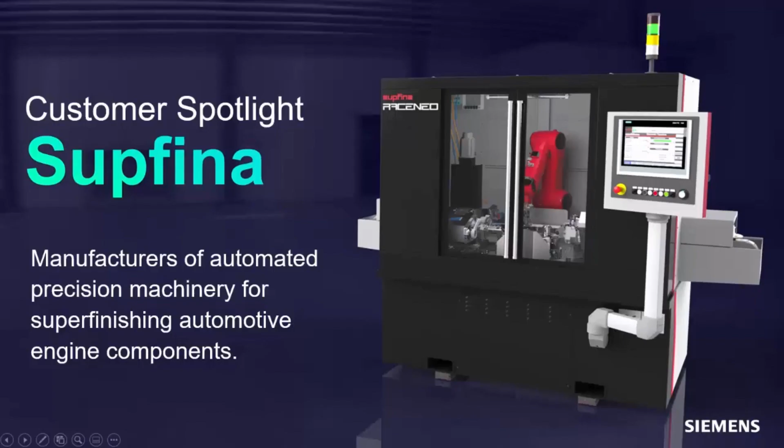Thank you, Michael. Welcome to this webinar on Solid Edge 2024. We're going to share with you today some of the great new functionality that's in Solid Edge 2024, allowing you to unleash the power of intelligent product design. Our featured customer in this year's release is Supfina from Germany. Supfina produces high precision, fully automated grinding and honing machinery designed for super finishing automotive engine components such as crankshafts and camshafts.

With this year's release of Solid Edge 2024, we continue to push the boundaries of product development. Solid Edge 2024 empowers users to design more intelligently across every aspect of product development, with a continued focus on the user experience and large assembly performance. Solid Edge 2024 introduces functionalities and enhancements to automate and speed design, as well as collaboration. Here are just a few examples: 9 times faster graphical performance, AI assembly relationships, great advancements in intelligent dimensioning, intelligent dimension checker, and so much more. We believe Solid Edge 2024 is up there with the best releases ever, but that's up to you to decide.

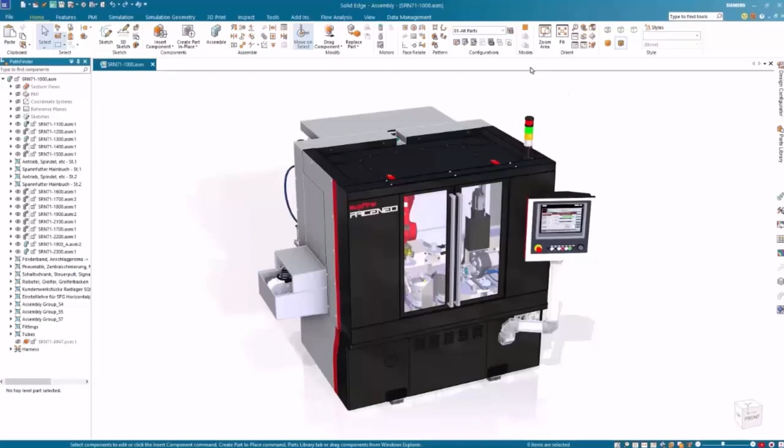Let's start with a look at some of the overall productivity enhancements. These are the things that will definitely make your daily life easier, and we are leveraging AI technologies in the design process to push that even further. Let's take a look. Let's focus on the polishing tool and fixture for these high performance motorsport roller bearings from this Supfina dataset.

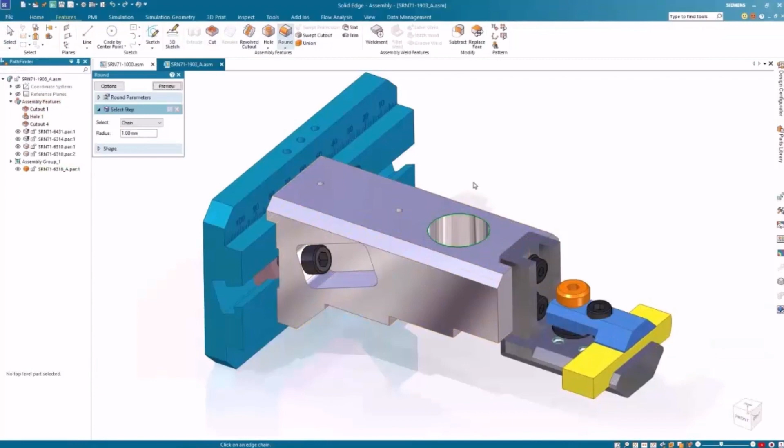By expanding the assembly features in Pathfinder, we notice a hole and cutouts are added at the assembly level and need to be completed with a round and chamfer. This can be solved by reordering the assembly features with the new simple drag and drop process that resembles reordering part features. This allows you to move parent and child features together, keeping your model organised.

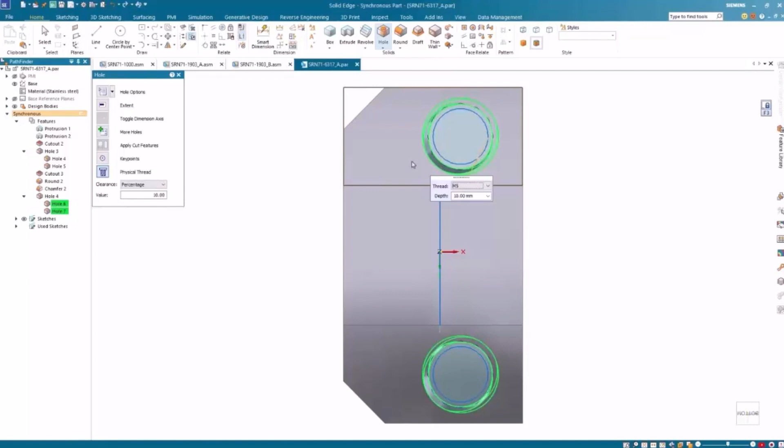The polishing tool has a 3D printed component that requires 2 holes to be added. To ensure appropriate fit and assembly for the 3D printed threads, we can define additional clearance values using the hole command. The values can be input as either a percentage or an absolute value. By selecting percentage, the internal diameter will increase by a percentage of the nominal diameter, which is seen in relation to the sketch. We can also switch the option to absolute to enter a specific measurement.

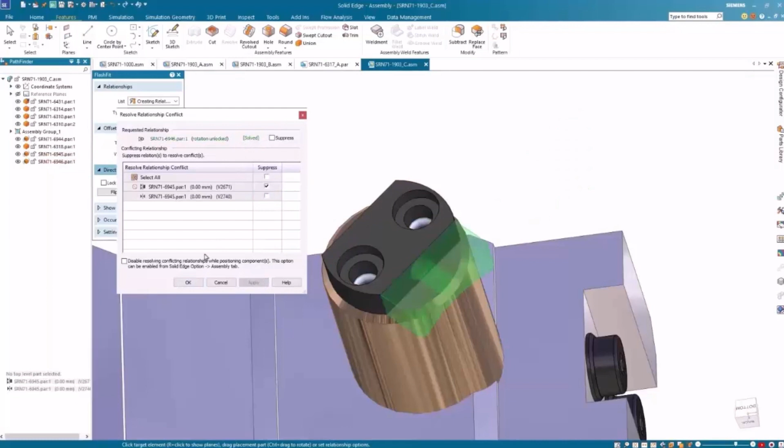To finish off the assembly, a polishing tool can be added to the bottom of the cylinder by adding a mate, planar align, axial align with the hole that connects the main assembly. Using the Resolve Relationship Conflict dialog box, we can easily identify and suppress conflicting relations to resolve them swiftly. This new tool helps streamline part placement and assembly relationships. Hovering over listed conflicting relationships in the dialog highlights them graphically. One or more relationships can be suppressed at a time until the requested relationship turns green.

The improved Replace Part command leverages artificial intelligence to predict solutions for replacing a single component occurrence constrained to a neighbouring component within an assembly. The AI predictions support planar and axial align relationships and present the solution in a secondary dialog, allowing us to preview and select the most suitable option before executing the replacement.

Enhancements to the variable table filters provide easy and quick access to filter options, resulting in an efficient experience that reduces both time and mouse clicks.

The variable table can be used to reposition the polishing tools and ensure they will contact the bearing in the correct locations. With numerous variables in the assembly, the results can be filtered by user created, system created, or both. Another great option for filtering is to only view variables relative to components that you select.

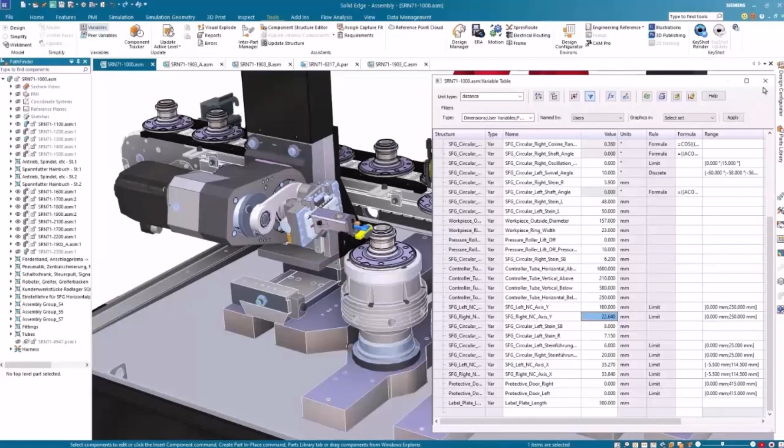This makes it easy to find the swivel angle variable and make a change. The vertical height of the polishing tool can also be changed by updating the NC axis variable.

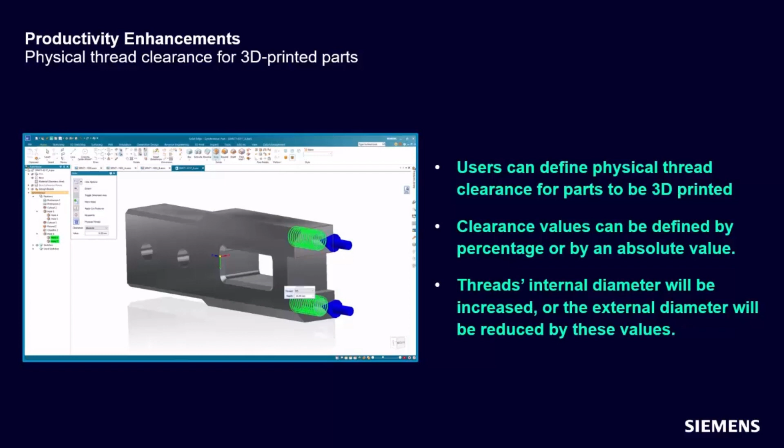One of the things that you saw was physical thread clearance on 3D printed parts. Turns out this is really important because unlike manufactured parts, where the standards define the clearance and high tolerances keep things working smoothly, in 3D printed parts you can get clashes that prevent smooth operation. Solid Edge automatically eliminates these, ensuring your printed parts work effectively and as designed.

You also saw the power of AI in action. With the improved Replace Part command, Solid Edge can now intelligently suggest assembly relationships and predict valid alternative solutions. The predicted solutions are graphically previewed in the design environment and can be easily selected in a pop-up dialog.

And in addition to working with your custom part designs, the AI-enhanced Replace Part functionality also works with parts from standard parts and 3D Find It part libraries. Really powerful stuff, and this is going to save you loads of time. And it doesn't stop there. Let's take a look at some more productivity enhancements.

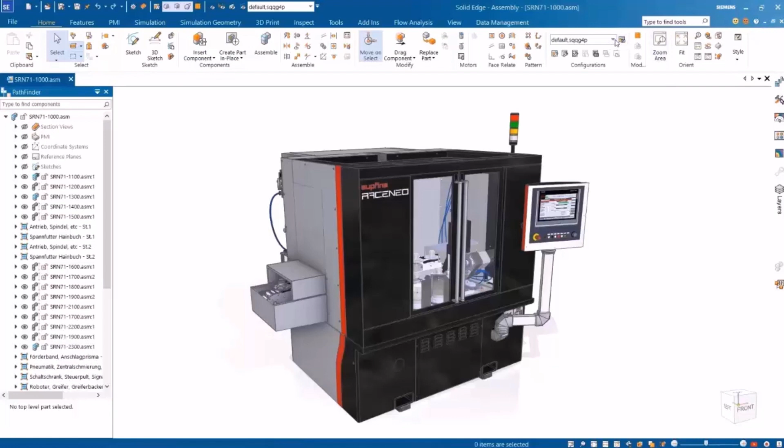Locating just the right part has never been easier. Search wildcards are supported in parts libraries, model view palettes, and the assembly PathFinder. These wildcards provide flexibility when searching, allowing you to match and retrieve parts based on partial or uncertain terms or variations in spelling in your query. Search results display subassemblies and parts in various shades of green for easy identification.

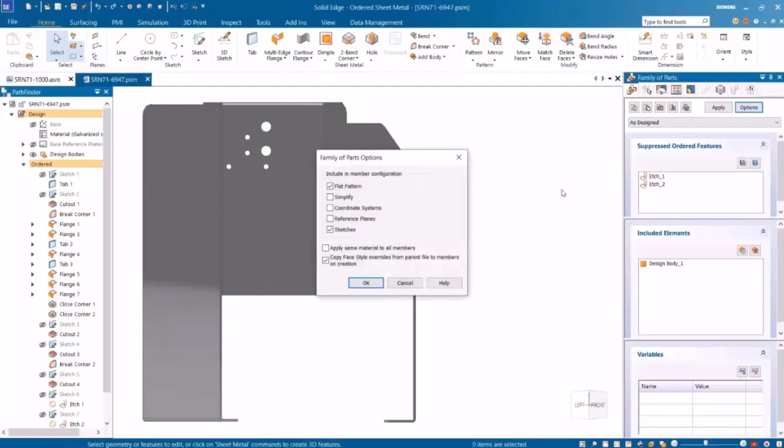With expanded family of parts options, flat patterns can now be included while working on sheet metal parts, containing all the information you need to create drawings and annotations. Once we define the new members, we can see options to capture sketches, file properties and variables.

Further enhancements to family of parts include the ability to set individual material properties per member, as well as control over the suppression state of sketches and etches. Selecting a specific member shows the material change alongside the different etches specific to each member.

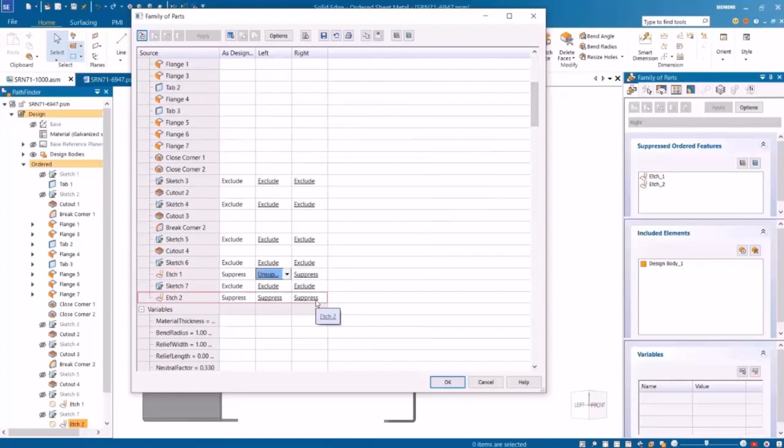Greater control of selecting objects has been added with the polygon and lasso selection fence options. This makes many common workflows much easier, like resizing holes. Using the lasso selection option, we'll select the desired holes and change the size with ease. Polygon and lasso selections are available in the part, assembly, draft and subdivision modelling environments.

Many designs require handed parts. These symmetrically opposite parts are identical, mirrored copies of one another. A new streamlined workflow makes it easier and faster to create these left- and right-handed parts that can remain associative to the original part if needed. With the selection of the face, mirror and a quick save, our new handed part is immediately available for use.

And the best part of using the Save as Mirrored command: all the features used for creating this sheet metal part are carried over, minimising errors when making downstream design changes.

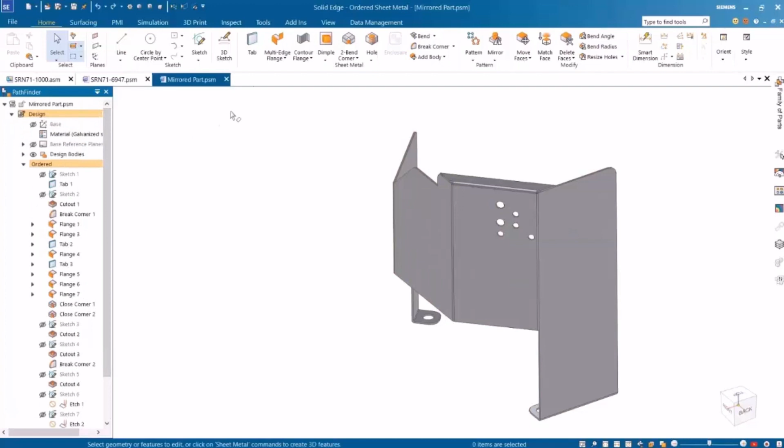The display of bend centre lines in the flat pattern environment is now supported within the sheet metal environment. Colour coding defines the bend direction: up bends are displayed in blue, down bends in green. The colour and style of centre lines can be easily modified to suit your company standards.

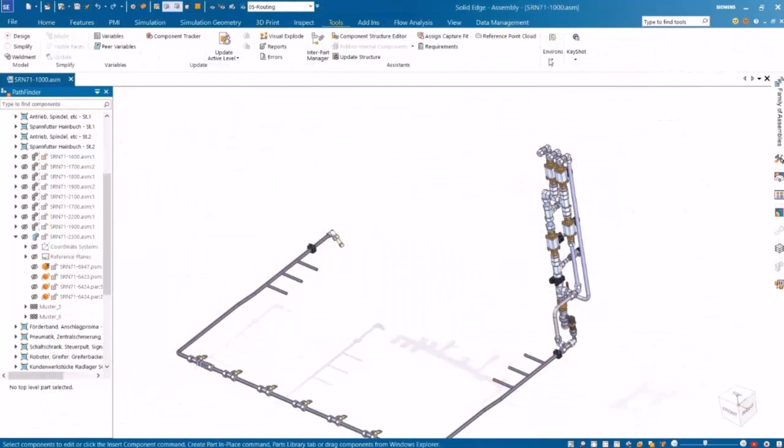In Solid Edge XpresRoute, multiple pipes and tubes can now be automatically trimmed with the help of the trim command. In this example, after turning on the clipping planes, we can see that there is overlap between the main tube and the 3 cleaning tubes.

We can trim these tubes so they join together seamlessly with just a few simple clicks. By selecting the primary and secondary tubes, the trim tubes command intelligently cuts holes in the main tube to the outside diameter of the secondary tube and trims the 3 cleaning tubes to fit, as we see here.

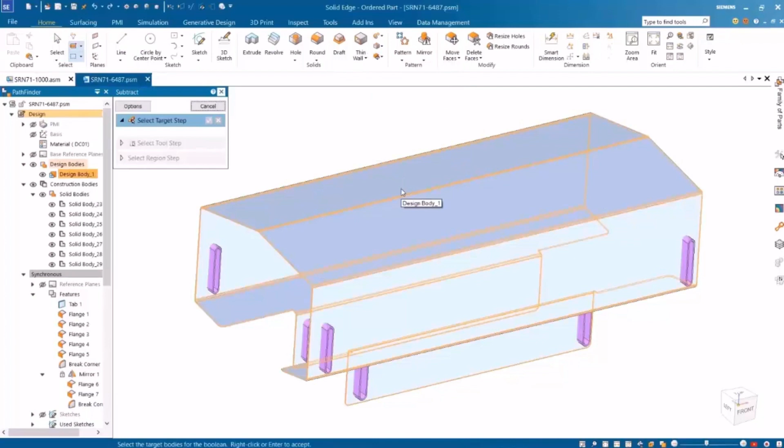Another new capability in Solid Edge is the recent documents preview, where we can easily select the part we'd like to work on without exiting the environment, saving time and energy. This sheet metal cover requires some modification, the addition of several punch slots. 7 construction bodies have been placed in the sheet metal part to represent the punches used to remove the material.

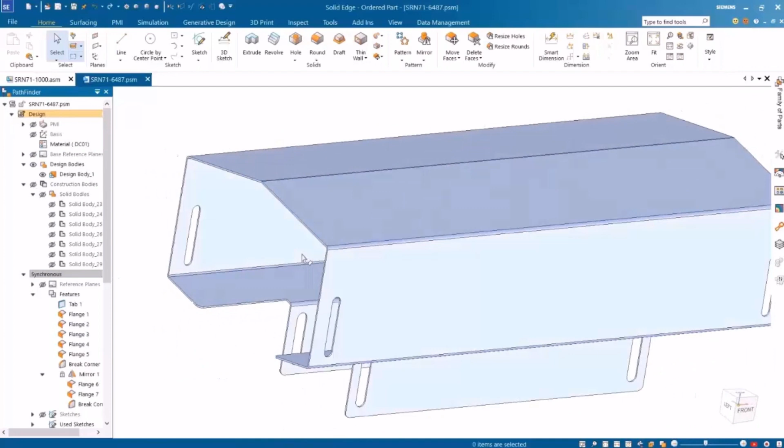Using the subtract command, we can select the main target body and then quickly and easily choose the solid bodies as a tool step, all within the same window. Unwanted regions left behind as a result of this subtract operation, or disjoint regions, can be intelligently identified and automatically removed. Hiding the construction bodies, we can see all the internal disjoint regions within the sheet metal part have been removed.

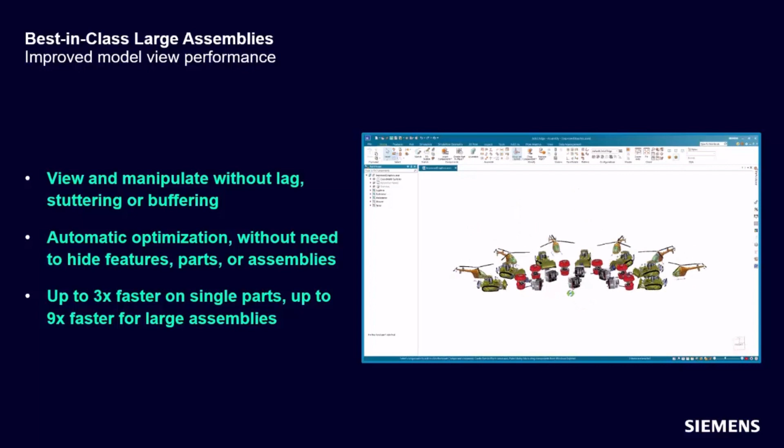Next up is large assembly performance. Solid Edge truly has best-in-class large assemblies, and now it's even better. Better model view performance allows you to view and manipulate even the largest assemblies without lags, stutters or buffering. As you can see, view manipulation is automatically optimized, allowing users to run the most demanding assemblies at lightning speeds without loss of detail or the need to adjust settings to hide features, parts or assemblies.

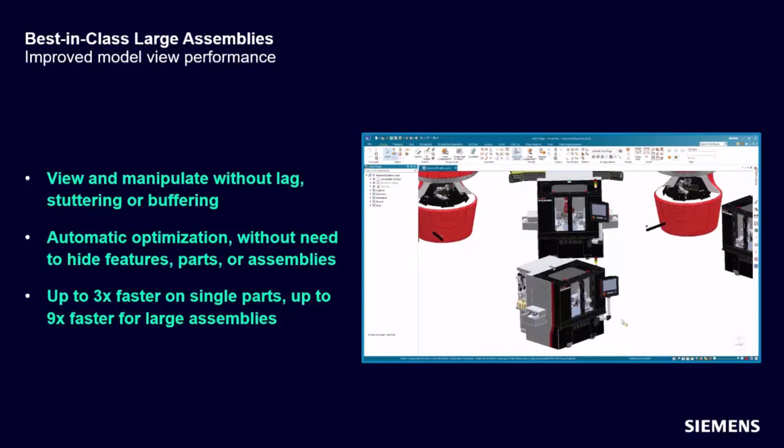Dynamic viewing is up to 3 times faster on single parts, up to 9 times faster for very, very large assemblies. Don't take our word for it. Try it yourself on your assemblies.

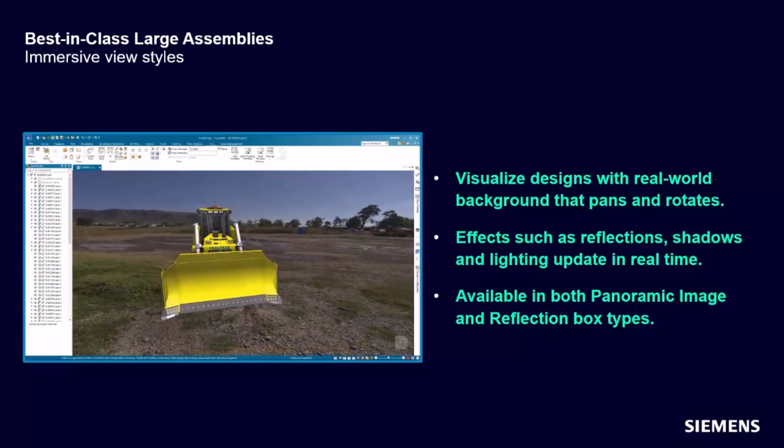The new immersive view styles puts your models in a real-world environment that automatically updates with model movement for more realism. In addition to the amazing speed improvements, you can also now visualize designs with a real-world background that pans and rotates with your model to create a more immersive user experience. As the design is manipulated, graphic effects like reflections, shadows and lighting are also updated. This creates a more realistic, lifelike representation of the model's environment, just like you're walking around the model in the real world.

Next up is Design Configurator, and I want you to pay special attention here because we know so many companies can benefit from this technology. Not only can you configure your own designs instantly, but now we're also delivering pre-configured conveyors and ladders and other equipment that is commonly used in large machines and plants. What a time saver. Let's take a look.

Manufacturers are facing increasing pressure by their customers to offer greater choice and variety in their products. This can lead to an increase in the number of product variants organisations need to define, author and manage. New pre-configured models in Solid Edge Design Configurator allow you to quickly and easily place intelligent datasets for ladders, conveyors and enclosures directly into your design.

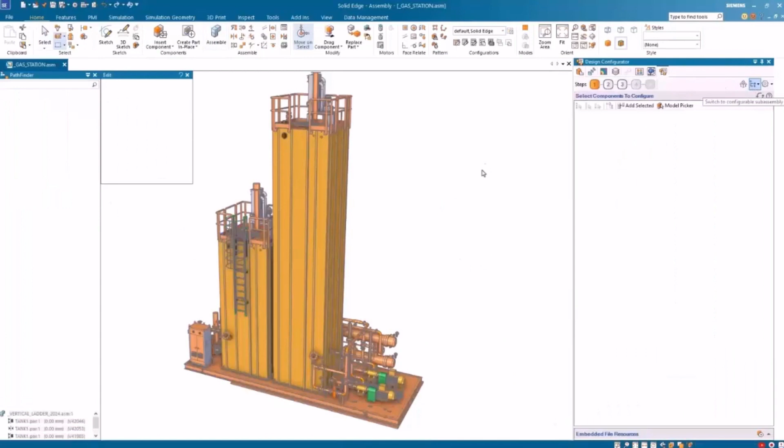The ability to customize fully configured sub-assemblies inside the main assembly helps simplify workflows and improve productivity. In this example, a fully configured ladder assembly is being modified directly within the main assembly environment. There's no need to go back to the sub-assemblies and configure them individually, saving you time and energy. A secondary ladder is needed to complete our design. After placing the ladder, we can customize the length due to the intelligent model's rules. A second section and hoop in the middle are also added.

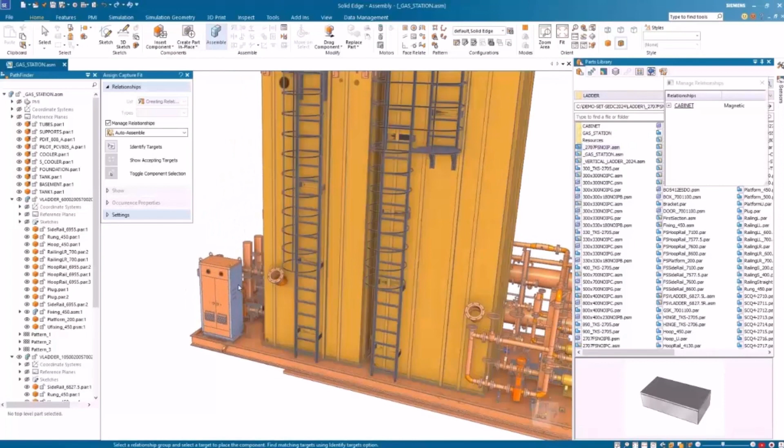To finish up the assembly, we need to add a final cabinet. The cabinet can quickly be customised inside the main assembly with the necessary dimensions and colours to fit our needs. With access to fully configured datasets such as ladders and cabinets, it's never been easier for customers to get started quickly with Solid Edge Design Configurator.

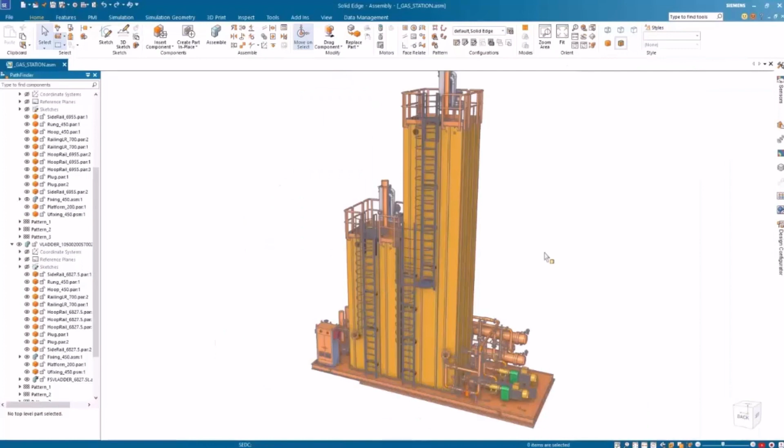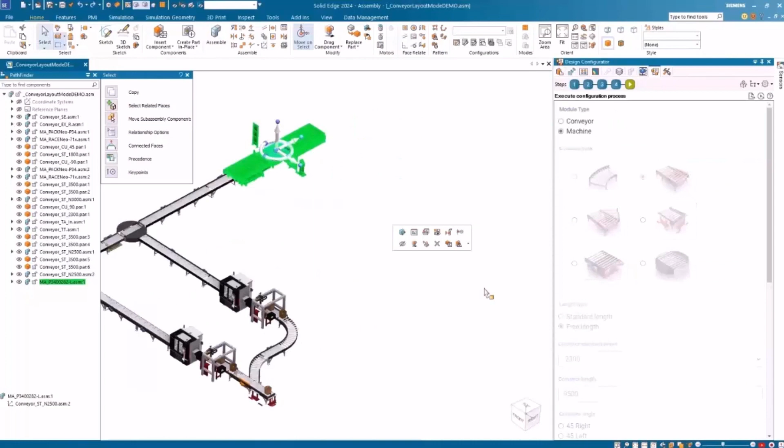Solid Edge Design Configurator can automatically calculate the number of conveyors and other components needed to match the user's specifications. By inputting 10 meters, the software automatically determines the number of conveyors needed within the specified distance to complete the line. With the last machine added, the new assembly line is finalised and ready to be used.

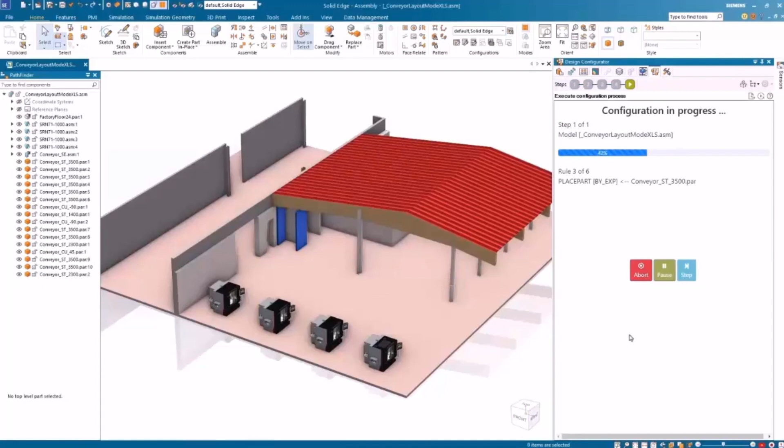The new ability to read from Excel files and external databases for input data and model actions allows you to automatically complete assembly lines at a fraction of the time. By reading the necessary conveyor placement data from an Excel file, the software instantly configures and completes the assembly line with just one click, like we saw there.

Could you use something like that in your business? Isn't it amazing how quickly those conveyors went into place and were fully configured in seconds? You can really boost design speed using pre-configured models of ladders, conveyors and enclosures. One of the most requested customer features, pre-configured models downloaded from the Siemens Support Center, can now be directly used in the assembly at no cost to the Solid Edge Design Configurator user.

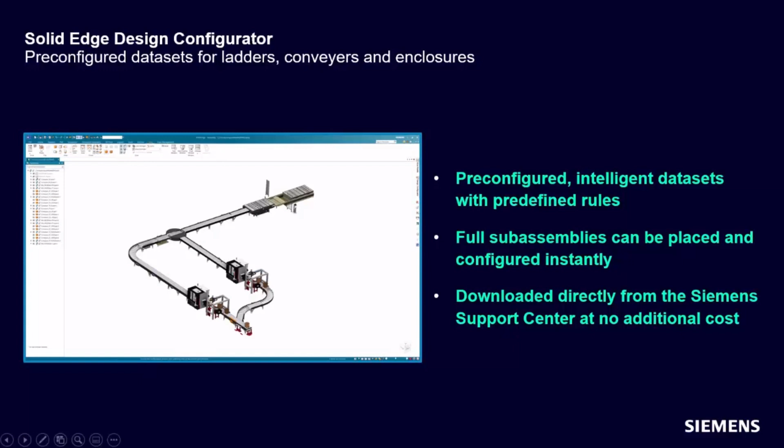In addition to all the great Solid Edge functionality you saw for configuring designs, you can also take advantage of Solid Edge Design Configurator Connect. This is a user-friendly, web-based configurator that manages the most complex pricing and product configuration, allowing users to configure online in any browser simply and easily, and automatically generate sales documentation, including 3D models. Connect your engineering processes with sales and marketing, streamlining design workflows with the new Solid Edge Design Configurator Connect.

Moving on, let's take a look at model-based definition, often just called MBD. This is all about moving the intelligence of the drawing upstream into the model. Why should the geometry be in the model, but critical information like tolerances be in the drawing? When we move all the intelligence into the model, we lower the 3D communication barrier and better convey design intent for downstream manufacturing processes. Here's how it works.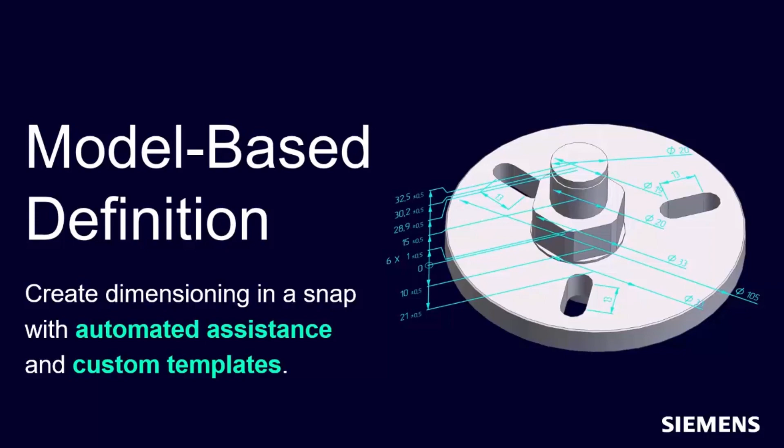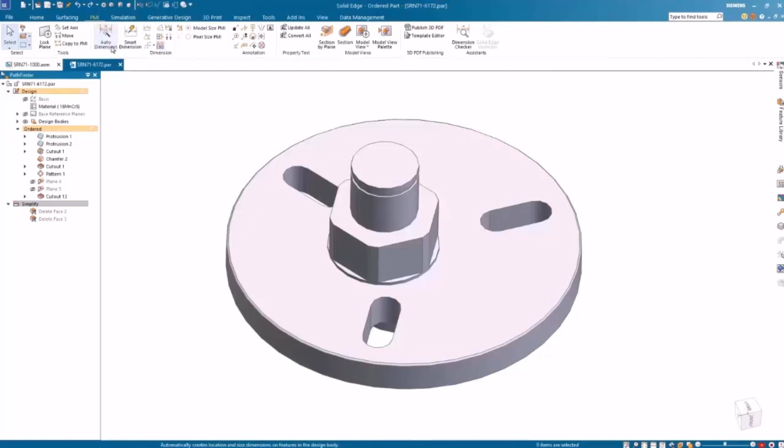Intelligently define and annotate 3D models while better conveying design intent for downstream manufacturing processes with Solid Edge Advanced PMI and model-based definition. The improved auto dimension tool in Solid Edge Advanced PMI can be used with one or two datums for more freedom when automatically dimensioning turn parts. Using the new recent documents preview, we'll open another bracket that's been partially dimensioned.

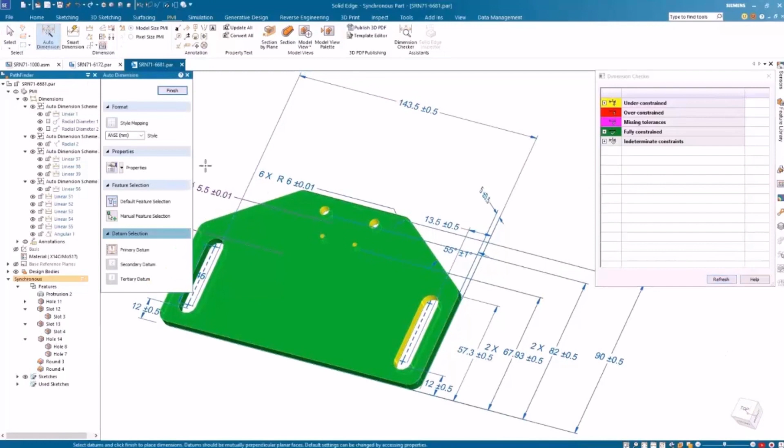With the dimension checker command, quickly and easily identify the constraint status of features and parts. The model is automatically color-coded with feature IDs, informing you of the constraint status of features and if they lack tolerance information. In this example, the slot and holes are under constrained, and the dimension is missing a tolerance value. By adding the necessary tolerance, Dimension Checker will instantly update with the new status, and the Auto Dimension tool will automatically add the missing location dimensions for the holes, improving the creation speed.

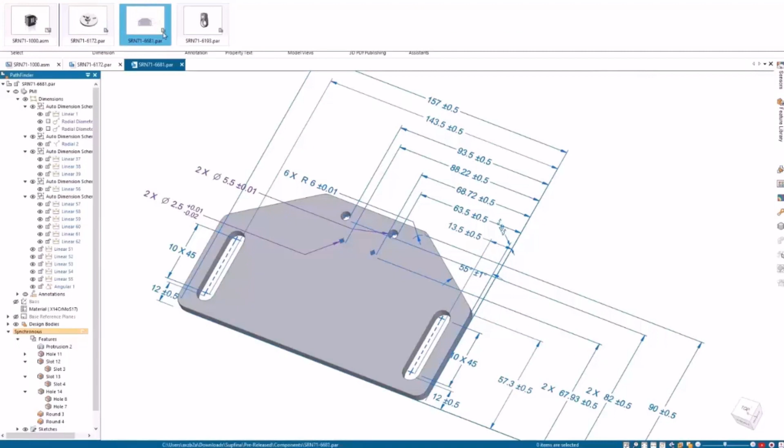The improved Auto Dimension tool also includes stack dimensions and callouts for slot and oval cutouts. Features chosen in the selected primary, secondary and tertiary planes can be auto-dimensioned instantly. The Common Model Views command allows users to create common model views automatically with existing PMI with the required views selected. Solid Edge automates the view creation.

Applying section views to a model view is easy with the enhanced vertical command bar that can be launched from the model view palette. These easy-to-use command bars make editing model views simple, like adjusting the render mode as we see here. To clean up the PMI dimensions, we'll run the Enhanced Arrange Dimension command, which provides the ability to arrange coordinate dimensions alongside linear dimensions.

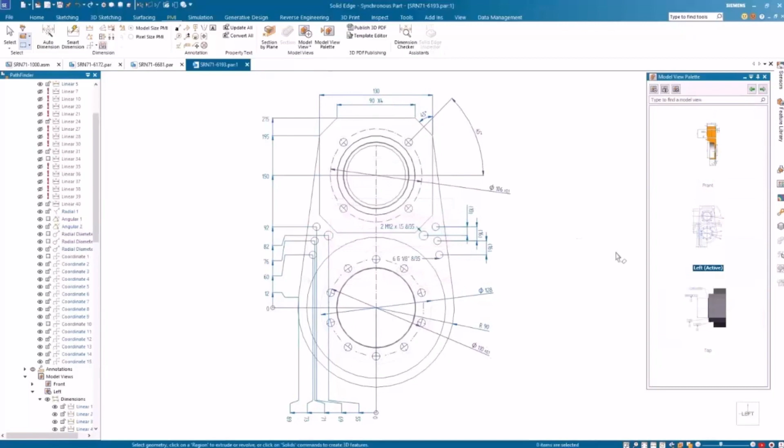The Update Model Views automatically updates all model views when the model changes or a PMI is added or removed. Auxiliary plane indicators can be added, giving us more freedom to annotate the models based on an ISO or DIN standard, as we see here. Convey design intent for downstream manufacturing process with 3D PDFs that can be published using templates. You can export PMI views with selected section views and render styles to the 3D PDF, including those created with single planes to streamline the delivery of relevant design information.

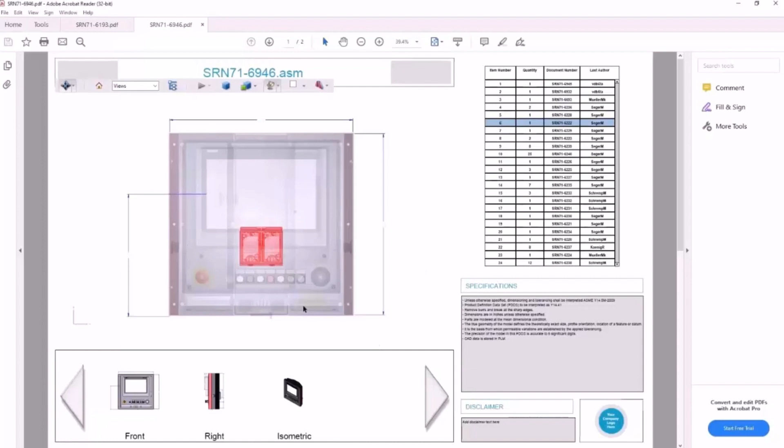With new PMI face association, parent faces and section views are automatically highlighted when they are selected in the 3D PDF. For assemblies, 3D PDFs can contain an interactive parts list. On selection, parts are highlighted in the list and graphics window. Associated properties such as author can also be included. Interoperability enhancements allow your Solid Edge files to look the same when opened across the Siemens Accelerator portfolio, including NX. The improved PMI association and support for various PMI data provides increased connectivity for downstream applications.

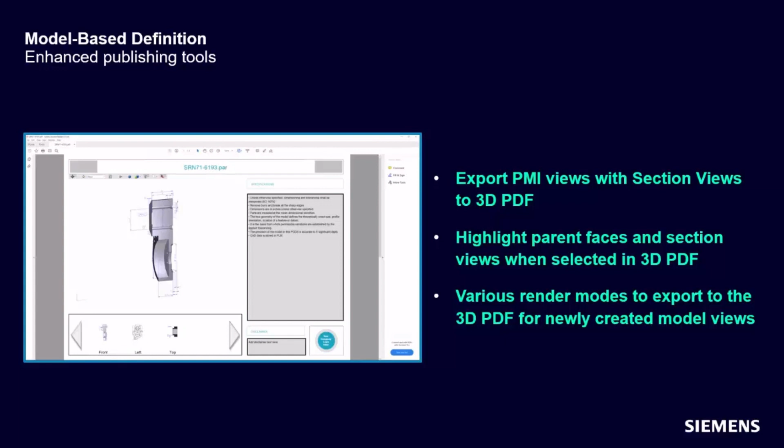Now, I've been talking a lot about core CAD functionality, and that truly is important, but more than ever, collaboration is key to improving engineering productivity. No one could have imagined over recent years how distributed our teams would become, but we definitely have some amazing tools to support this, and this comes in the form of Solid Edge SaaS, where collaboration is built right into your daily work. Let's take a look.

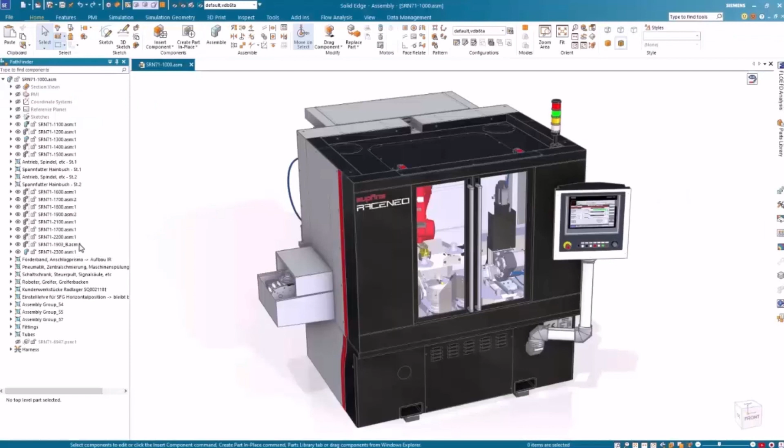Fully embedded in Solid Edge 2024, Teamcenter Share streamlines collaboration with your team, partners and customers. Users can now access Share's comprehensive suite of collaboration capabilities completely within the Solid Edge environment. Open our Supfina superfinishing machine from Teamcenter Share in Solid Edge. We can get to work quickly as we look to add threaded holes to this part we plan to 3D print. Here you'll notice the option to add additional clearance to the threads that we discussed in an earlier demo.

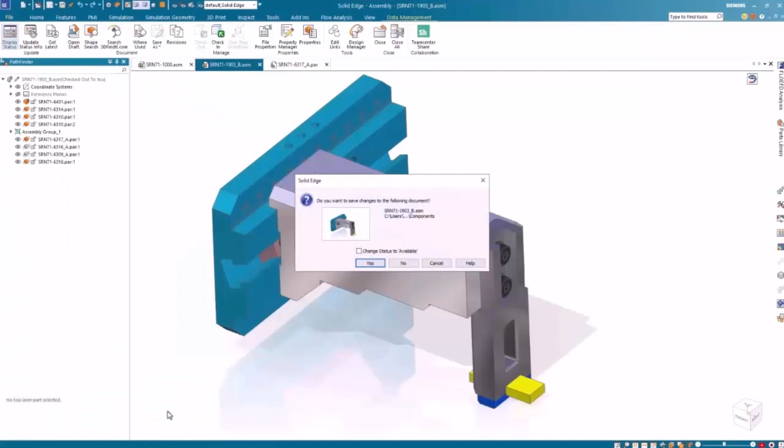Using the built-in data management capabilities, we can check in files to allow other users to make modifications or check out an assembly to ensure exclusive access while we make changes. Again, with Teamcenter Share fully embedded in Solid Edge, we never have to leave the design environment as we create a project with just a few clicks. With Pack and Go and the Siemens Connector, we can share the subassembly directly to Teamcenter Share.

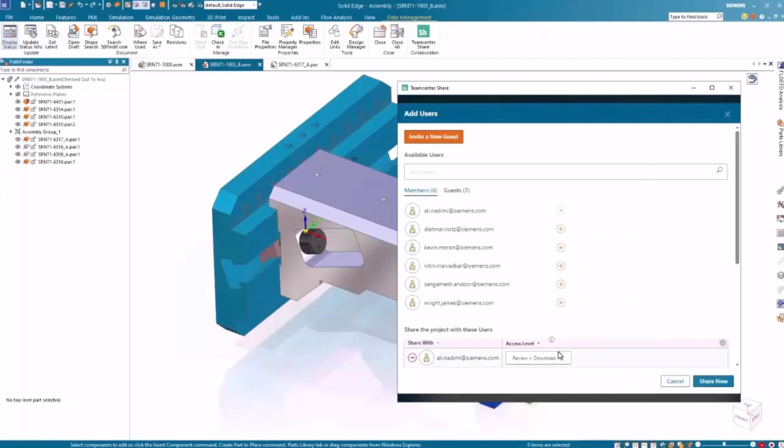Back in Teamcenter Share, within Solid Edge, we can open the project and add users to share it. Users can be granted various access levels depending on the type of collaboration needed. We'll grant this user owner rights, giving them complete access to review, edit, delete, or reassign the project. Other access levels include review plus download, and full access. Opening the viewer markup gives us the ability to inspect the data quickly and collaborate with our team members.

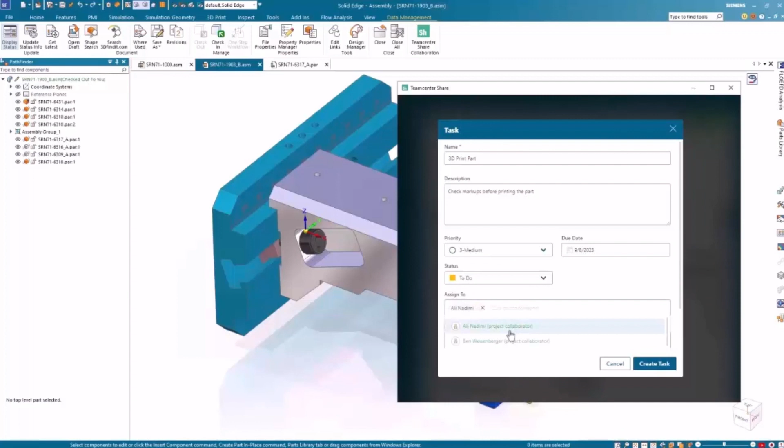With the addition of threads, we want to make sure the spacing is still correct. A quick comment starts the conversation, and saving the markup makes it instantly available to our team. Creating tasks has never been easier in Solid Edge thanks to Teamcenter Share. After naming the task, users have full control to add descriptions, set priority levels, due dates and statuses, and can assign the task to team members. Tasks can be viewed in a variety of ways, including on your Teamcenter Share dashboard, or as we see it here, in a Kanban board. Working together to help you work better together, Solid Edge and Teamcenter Share continues to boost collaboration and productivity.

So you saw how you can access Teamcenter Share's comprehensive suite of collaboration capabilities fully in the Solid Edge environment. The complete Share web user interface is embedded entirely within Solid Edge 2024, allowing for more streamlined collaboration workflows right at your fingertips. The same browser-based experience of Teamcenter Share is still available anytime, any place and on any device as before. But now Share is also available without leaving Solid Edge. This saves users time by eliminating the need to switch between different application windows. Plus, you can synchronize your Solid Edge design data on your desktop and in the cloud. Automatically installed with Solid Edge, Siemens Connector offers enhanced integration between Solid Edge and Teamcenter Share, enabling you to work seamlessly with your cloud and desktop data alike.

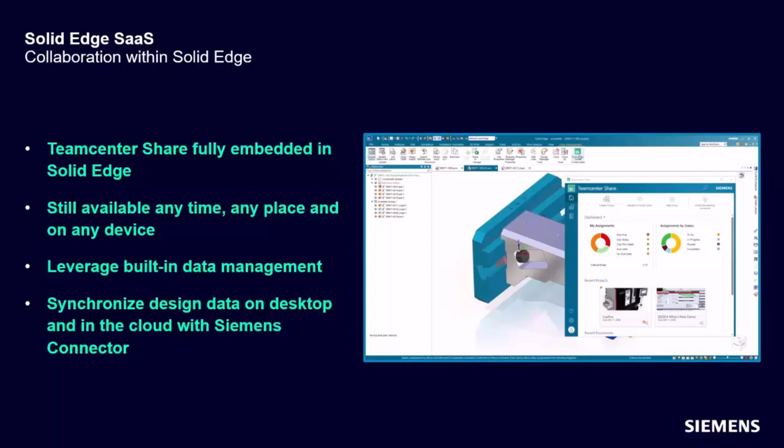In addition to the great enhancement of having Teamcenter Share embedded in the Solid Edge environment, we continue to improve Teamcenter Share as it supports products across the Siemens Accelerator portfolio. You can now onboard multiple users faster and easier, or share projects, assign tasks and send messages to users not currently associated with the project, attach notes to projects, files and tasks, and send messages instantly. To support ever-growing file sizes, especially those for simulation files and results, users can now upload files of up to 500 gigabytes each. Additional cloud storage packages up to 100 terabytes are now available.

Okay, so changing tack a little bit, Solid Edge CAM Pro has also received a great update. Get faster and more accurate programming with Solid Edge CAM Pro. Let's take a look. Solid Edge CAM Pro continues to improve productivity by leveraging artificial intelligence to suggest the most frequently used machining options in a new prediction tab. No more hunting for options. The prediction tab is customized for each user.

New for Solid Edge CAM Pro is auto-generate for 2-axis and 2.5-axis operations. For simple turning operations or for certain 2.5-axis milling, we no longer must generate the operation. As soon as enough parameters are available to calculate a toolpath, Solid Edge CAM Pro takes care of it. This makes NC programming faster by allowing users to review results far quicker. Similarly, any changes that require recomputation are automatically performed. See the latest result as soon as the parameters are changed.

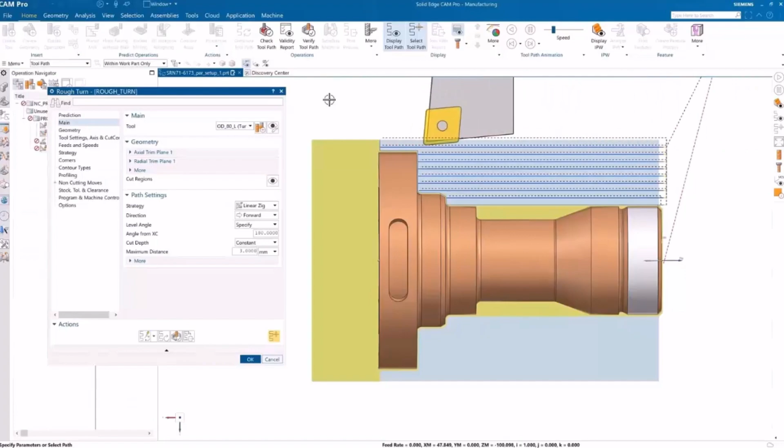New this year is support for prime turning. Using either Sandvik Prime Turn A or B turning tools, we can quickly, efficiently and safely remove the material from this undercut. Notice how smooth the entrance and exits are, which produces less stress during the cutting and helps the inserts last longer.

Solid Edge CAM Pro introduces 3D adaptive roughing, which provides the most efficient roughing machining possible. 3D adaptive roughing has reliable dynamic holder collision checking when the tool moves within a region or across multiple regions. Toolpath generation is faster and bottom-up cutting has been enhanced. We also added a new option to top off flat faces for faster throughput.

Moving forward, with our success with PostHub, we are now introducing the Cloud Connect tool library. As the name implies, cutting tools are now stored in a cloud database for easy access. Tools and holding devices can be easily searched, downloaded and modified. Additionally, immediate access for cutting tool vendors is available from the same location.

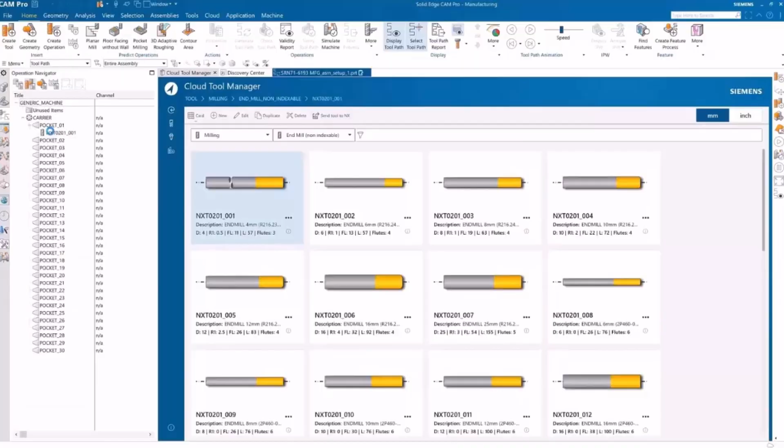Turn milling is a new operation subtype designed to easily machine concentric and eccentric cylindrical surfaces with a high surface quality, precision and high cutting volume. A new operation subtype in the rotary milling template, it is used to pre-cut cylindrical parts before machining segments with other rotary milling operation subtypes. Solid Edge CAM Pro provides cutting edge updates that accelerate machining while bringing the power of artificial intelligence and the cloud to your manufacturing process.

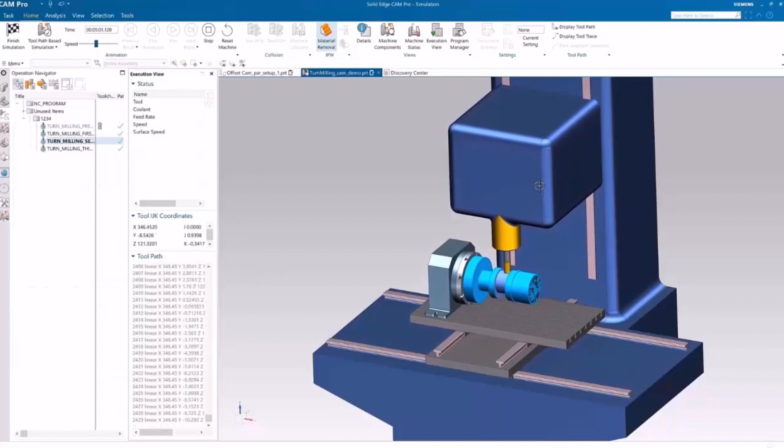If machining is your thing, you have noticed some real time savers in there. The 3D adaptive roughing means faster programming and more efficient machining, while the AI assisted operation editing predicts the most probable parameters, accelerating programming and processes and ensuring accurate repeatability. The new prediction mode will learn from the user's best programming practices to dynamically change and predict user behavior.

The Cloud Connect tool library is a new application that utilizes the cloud to provide a user-friendly, intuitive experience when previewing tools and dimensions. And prime turning is now supported. Prime turning is a new methodology which enables turning in all directions, resulting in a 50% productivity increase for turning operations.

Now moving on to simulation. Enhancements in Solid Edge Simulation and Simcenter Flow EFD for Solid Edge increase simulation performance and speed with improvements to meshing, structural analysis and interoperability. Let's go and take a look. New for Solid Edge 2024 is the ability to import solid temperature results from Simcenter Flow EFD for Solid Edge into a Solid Edge static simulation study.

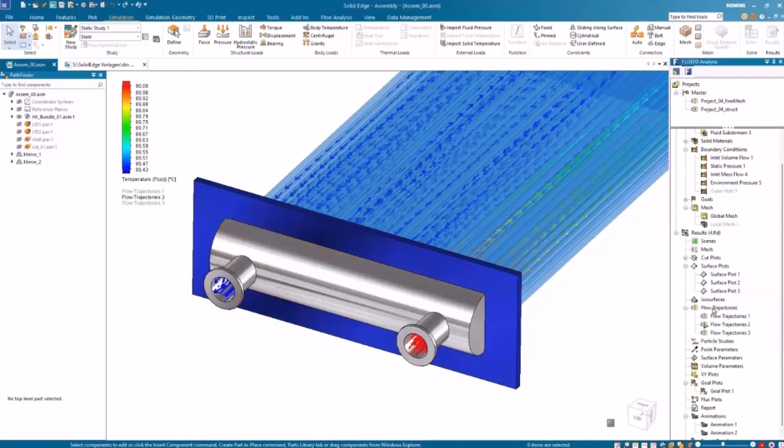Here we see the results of a Flow EFD simulation in a heat exchanger and the temperature distribution of the fluid flow on the parts. Changing to Solid Edge simulation, we already have a study created with all the constraints but without any loads. Using the new import solid temperature function, we can set the load for our simulation study and start the solve. The Solid Edge simulation study processes the results from Flow EFD and solves the calculation. Viewing the results, we can see there are high stresses in the parts implemented by the temperature loads.

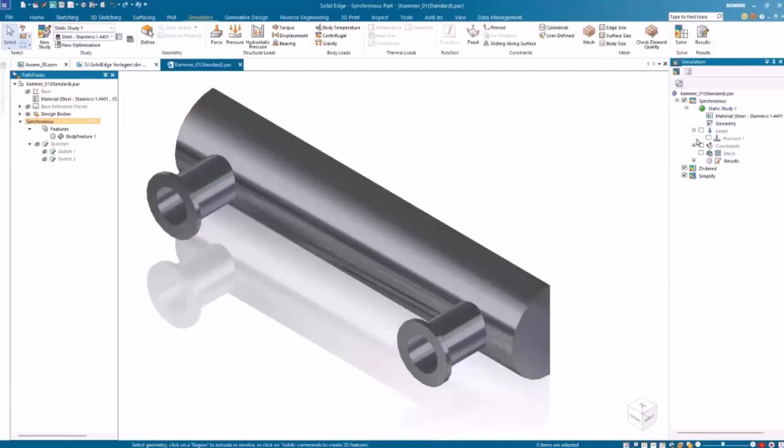The interoperability between Solid Edge simulation and Simcenter Flow EFD for Solid Edge is useful to find the thermal stresses and deformation in solids, helping understand part behaviour and avoid failures long before real products are manufactured. Solid Edge 2024 also introduces the ability to apply a force to any user-defined point, allowing for greater control of simulation studies. In this example, we have already created a study to show what happens when the component is put under internal pressure. With some further analysis, we can devise some additional loads.

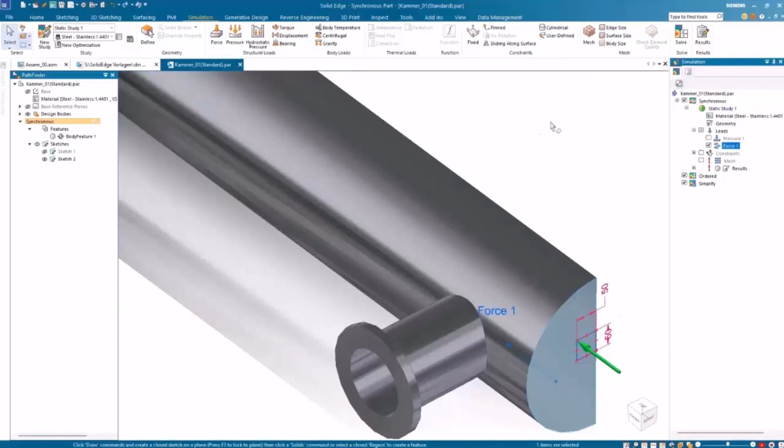An easy way to do this is simply to add a force to a point. We have already defined a sketch, but we'll add an additional sketch point that we wish to use in our study. New in Solid Edge Simulation 2024 is the ability to define a force by selecting a user-defined point. This provides greater control and flexibility.

We'll set the force direction, solve the study, and then review the results. This is another example of great productivity enhancement in Solid Edge Simulation 2024. Finally, we want to look to another function that is very useful for checking more complex models. A model already has a mesh generated.

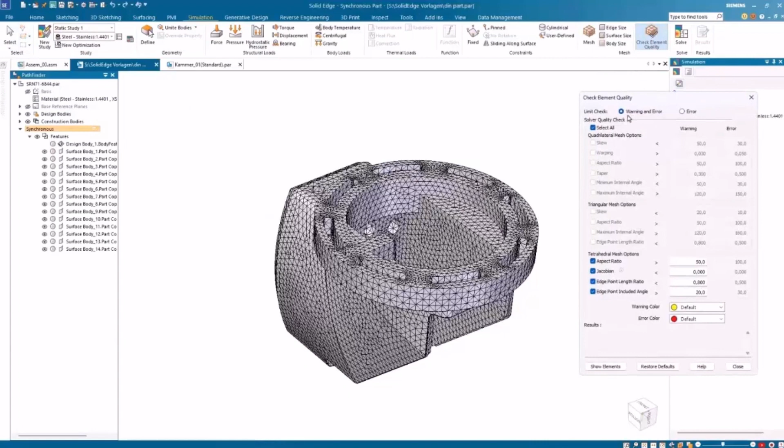We wish to analyse the quality in the part with the check element quality function. In previous versions, it wasn't always easy to identify the problematic areas within a part. Now the display of mesh quality checks has been improved to make it easier to identify poor quality areas. Users can now immediately identify the areas of poor quality and take the necessary actions to address them.

We've just seen how Solid Edge Simulation users can now import solid temperature results from Simcenter FloEFD into a Solid Edge study. The new option to apply force to any user-defined point rather than just a mesh vertex allows for greater control of simulation studies. And the display of mesh quality checks has been improved to make it easier to identify poor quality areas.

Finally, the insulated gate bipolar transistor or IGBT compact model is now composed of an electrical element and two resistor component compact models, providing a very efficient representation of the IGBT element.

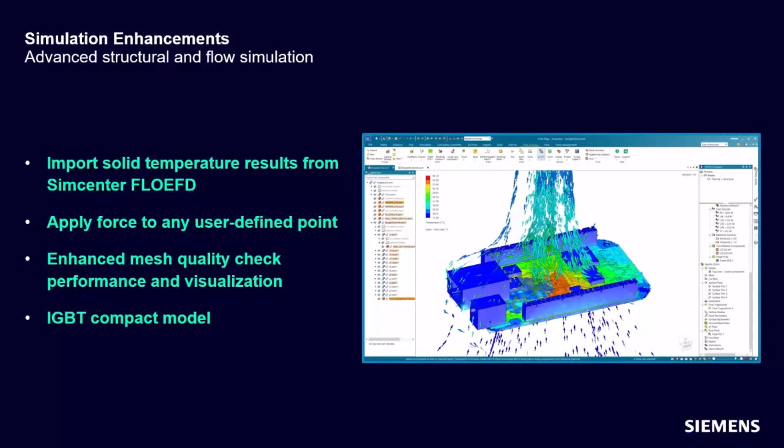Next, let's talk about value-based licensing, which is a truly important innovation, allowing you to explore and use a wide variety of Solid Edge portfolio products at a very low cost. Rather than traditional purchasing of individual products, value-based licensing provides cost-effective bundles of license tokens that can be used to access Solid Edge add-on products on demand.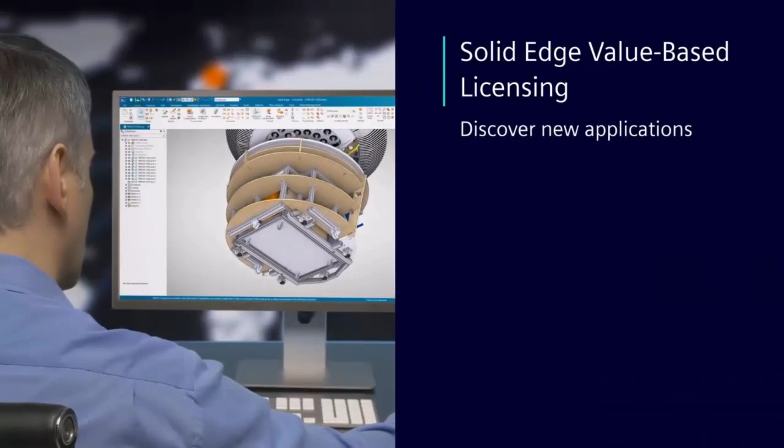You get instant access to advanced functionality that can be shared across your product development teams on an as-needed basis and at a much lower cost than buying individual products. Let's take a look at how this works. New for Solid Edge, value-based licensing. A flexible licensing option to help you with the challenges of a rapidly changing development environment. This approach allows you to discover new Solid Edge add-on products while increasing flexibility for you and your team.

Let's have a look at how value-based licensing works, starting with the base application, Solid Edge Classic or Premium. Value-based licenses offer a fully flexible environment in which users can explore different functionalities. Companies acquire a set of tokens, which allow the running of a wide array of applications. Tokens are available in yearly subscription packs that make the add-on products available as a single shareable bundle. Tokens can be checked in and out to allow for maximum flexibility.

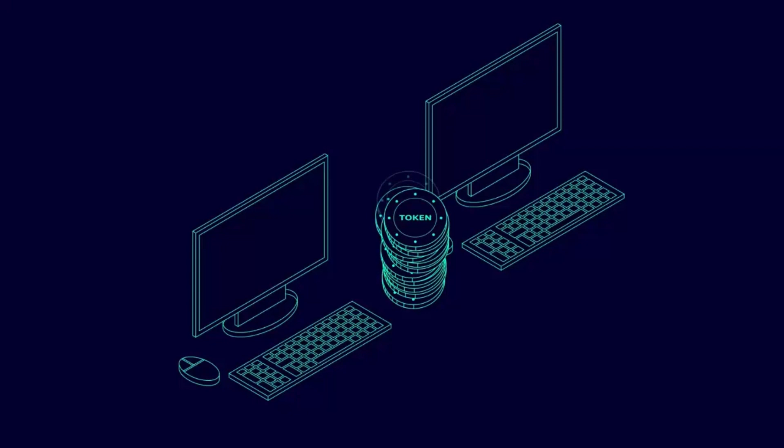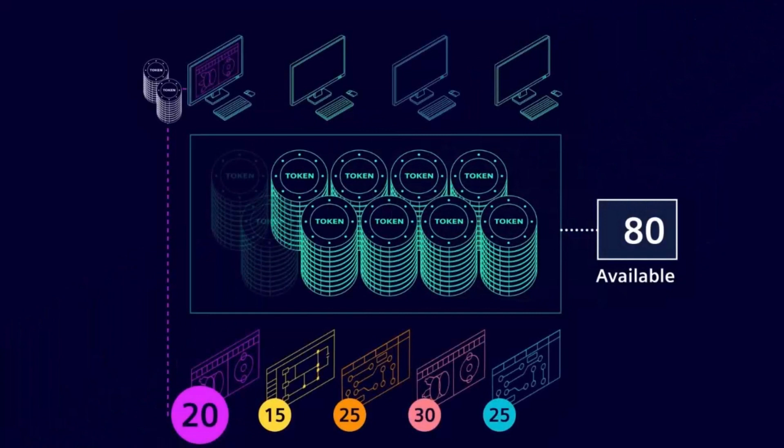Each add-on product consumes a defined number of tokens when in use. The total number of applications and which specific applications can be checked out is limited by the number of tokens users have available. Value-based licensing is even more flexible when combining multiple users, each with their own desktop and set of tokens. Just imagine, a worker is confronted with a maximum token limit. By having a joint token pool, the limitation is automatically lifted as he or she is able to claim unused tokens from a colleague. In this context, it's also perfectly possible for users to use the same application simultaneously, as long as the token maximum isn't reached.

Value-based licensing gives you the ability to manage costs, discover new applications, and easily scale your business. In many cases, the total investment is less than individual licenses, yet the flexibility dramatically increases regardless of whether the modules are used daily or occasionally. Value-based licensing, new for Solid Edge, offers a truly flexible, cost-effective, simple-to-scale approach that reduces risk over time and encourages users to maximally explore new possibilities. Is that something you could take advantage of?

Let's take a look at the list of products within value-based licensing. These are all valuable products, but are you going to use each one every day? What if you could just mix and match and decide what you wanted to use at any time without having to buy all the individual products? Well, now you can. Generative Design Pro, Point Cloud Visualization, Solid Edge Simulation Advanced, and all the others you see here are all available through the value-based licensing.

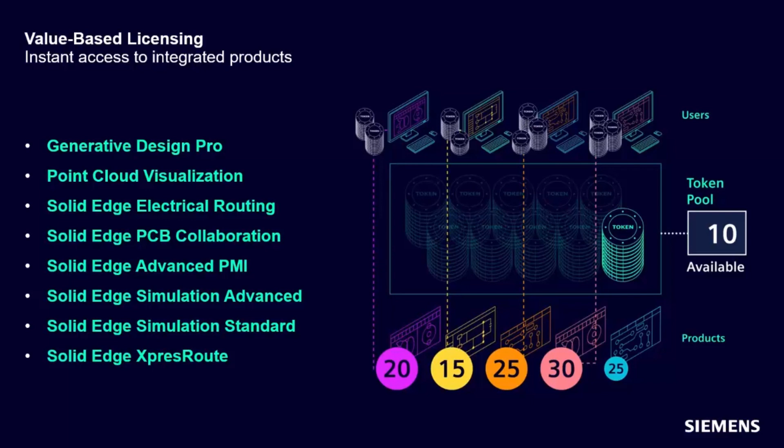You can see how this can add a whole new dimension of flexibility and access to your product usage. Tokens are available in yearly subscription packs of 25 and 50 that make the add-on products available as a single shareable bundle. Tokens can be checked in and out to allow for maximum flexibility. Users can mix and match the add-on products as needed within their permitted token allowance. It's really the ultimate in flexibility and will give you the access to technologies you never thought possible at an unbelievable price point.

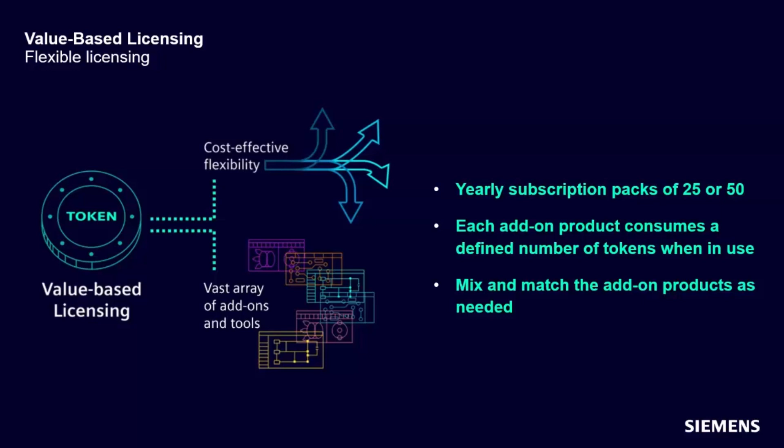And last but certainly not least, in addition to all the wonderful enhancements you've seen in Solid Edge itself, the Siemens Xcelerator portfolio is the most powerful in the industry, and with Solid Edge you can connect to many other powerful applications that are part of Siemens Accelerator, things like NX and Teamcenter. Let's take a look at how Solid Edge and Teamcenter work closely together in a product configuration scenario.

Engineering complexity explodes as products become more complex. Product cycle times become shorter, markets and manufacturing go global, and customers demand more choices and customization. Companies need a solution that enables them to manage this complexity from product's inception through manufacturing in a simple way that enables reuse and commonality and eliminates engineering cycles on products that will never be offered on the market. Teamcenter and Solid Edge are industry-leading solutions that address these challenges with tight integration.

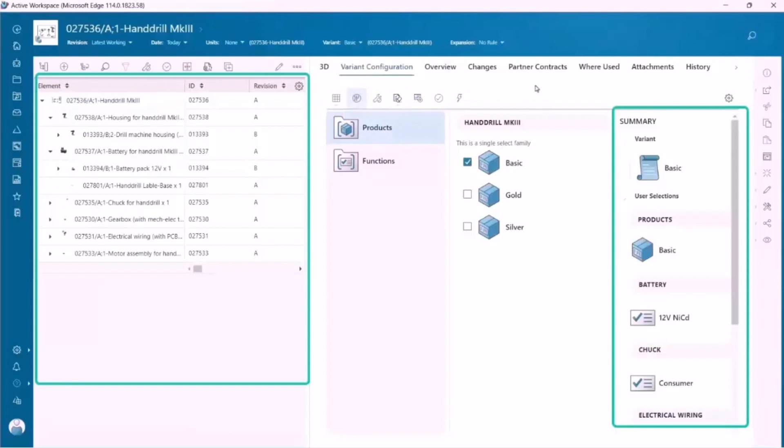Here is a hand drill assembly which has been configured with product family members, product features and variants in Teamcenter. We are seeing the full 150% bill of material, and if needed we can apply a variant which updates the bill of material accordingly. This hand drill assembly has been configured with 3 variants. Once opened in Solid Edge, we get the options to load 150% configuration bill of materials, or we can select a product variant which loads 100% bill of material.

We'll select the standard basic variant from the product family and load it into Solid Edge. All the components associated with the variant are loaded, and we can verify this by expanding the subassembly to visualize the components associated to the standard variant. The list of product variants defined in Teamcenter can be viewed, and the active variant currently loaded in the session is highlighted. This information is synchronized between Teamcenter and Solid Edge.

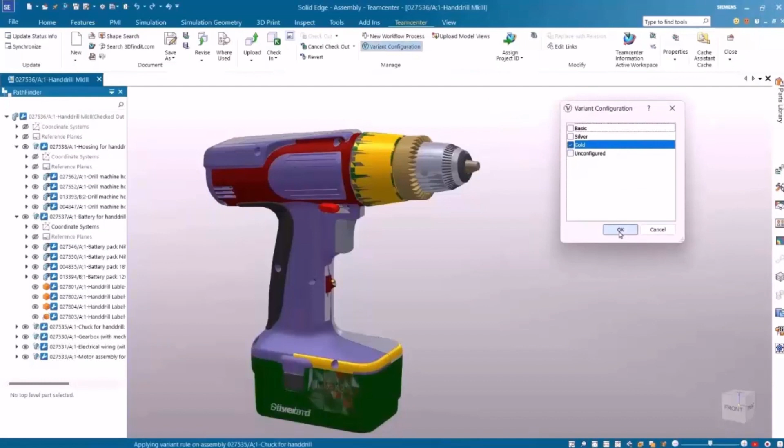We have full control whether we want to load a different variant, load more than one variant to provide us a 120% bill of material, or load all variants to create the 150% bill of material. If needed, we can edit and move the components. We have read-write access. We'll load the gold product variant, move the label part and assemble it in the correct location. To do this, we'll edit the battery subassembly, select the label part and use assembly constraints. Constrain it to a coordinate system. With seamless integration between Teamcenter and Solid Edge, you can build your product faster to meet your customer requirements.

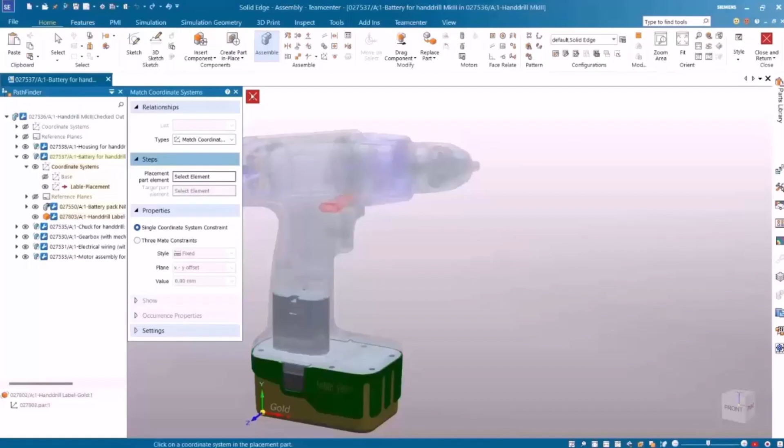It's great to see that tight integration between Solid Edge and the other Xcelerator portfolio products. Teamcenter Product Configurator, which enables users to create variant configurations of assemblies, is now fully embedded in the Solid Edge environment. This allows you to take full advantage of the digital twin by using a common variability thread for highly complex products. Powerful impact analysis technology is also available across the product suite.

We've also significantly upgraded our interoperability with NX. Changes to PMI in Solid Edge will now automatically update in NX, and the PMI from the Solid Edge files look the same when opened in NX. Support for stacked annotations, center marks, center line of bolt hole circles and more is now available. Additionally, assemblies created in Solid Edge that contain internal components now open correctly in NX.

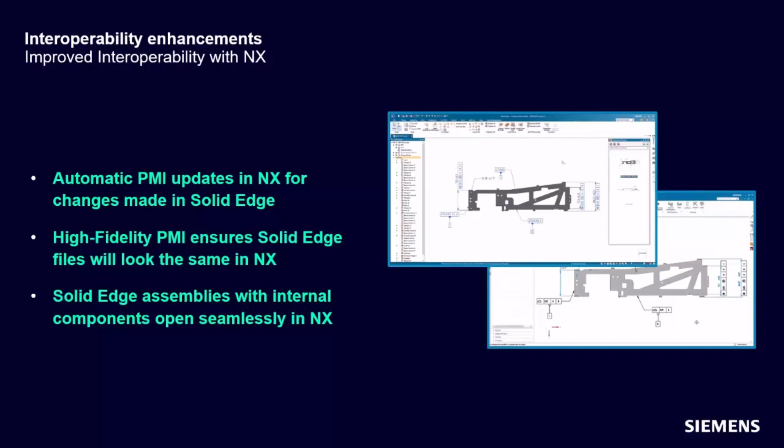And for those customers using both Solid Edge and NX, NX value-based tokens will run Solid Edge value-based products. So it's easier than ever to mix and match and interoperate between the two systems. We've also expanded interoperability and collaboration between other parts of the Xcelerator portfolio. For example, technical publications and Solid Edge Inspector are both integrated with Teamcenter Share, and Solid Edge Inspector now fully integrates with Opcenter and Teamcenter Quality.

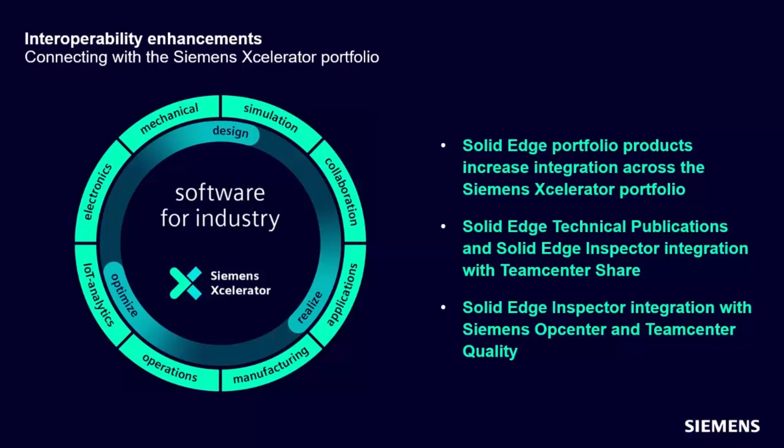Not only does Solid Edge work great with other parts of the Siemens Xcelerator portfolio, it also works great with data from external sources. So whether you're switching from another CAD system, reusing legacy design data, or working with suppliers, Solid Edge makes working with third-party files as easy as working with native data.

If you're working with customers or suppliers that use a different CAD system, CAD Direct is going to save you a lot of time. Rather than translating the file and having an intermediary file to keep track of and update, with CAD Direct, you can use the foreign file directly. So you can, for example, directly assemble a SolidWorks file into a Solid Edge assembly.

And for those of you migrating from other systems to Solid Edge, we've continued to make our best-in-class tools even better. Those of you coming from SolidWorks and Inventor will see even more complete and easier to use tools than in the past. We've also enhanced many of our other data sharing pathways, such as STL, Creo, and even 2D.

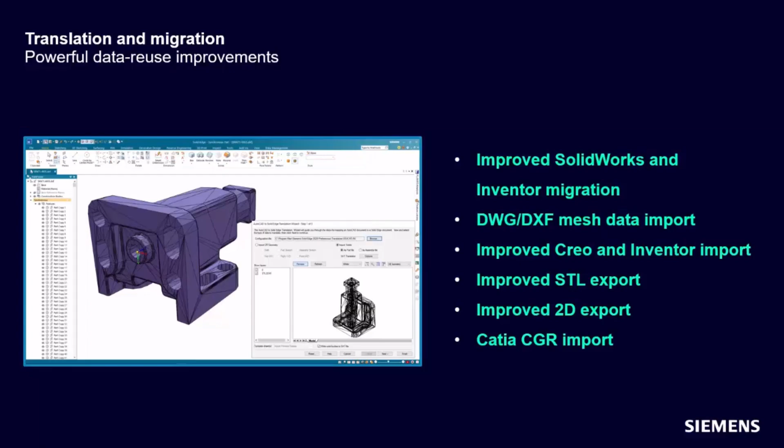As we finish up here, we want to remind you that there are now two ways to buy Solid Edge. You can, of course, continue to buy Solid Edge in its traditional or perpetual form, but Solid Edge Software as a Service, or SaaS as it's known, is now available as well, with an expanded cloud-based collaborative set of tools and value-based licensing. If you haven't yet looked seriously at Solid Edge SaaS, perhaps now's the time.

Back to you, Michael. Thank you very much for that, Paul. I hope you all found that useful and interesting.

And that takes us to the closing of the webinar. To summarize, Solid Edge 2024 empowers users to design more intelligently across every aspect of product development. With a continued focus on the user experience, large assembly performance and design productivity, Solid Edge 2024 will help you automate and speed up design and collaboration more efficiently. We can't wait to see what you do with it, and Solid Edge 2024 is now available for download.